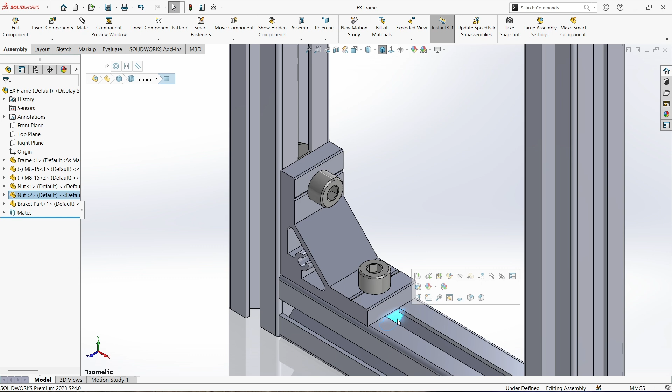You can use this feature like this. In this case, I have a bracket, bolt, and nut. If you want to copy this assembly, maybe you copy parts one by one, but that takes a long time. So I use Smart Component to make it faster.

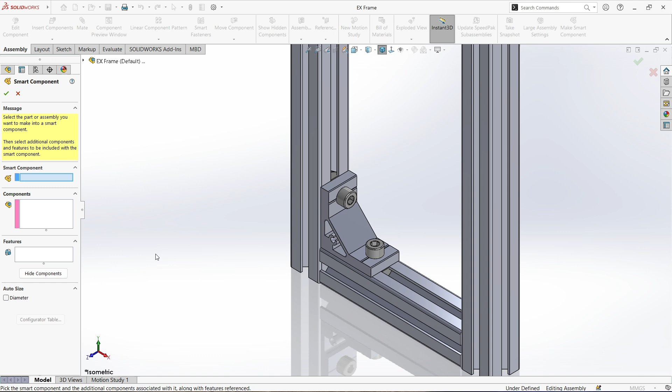Like this, activate Smart Component. Now you have three parameters: Smart Component parameter, Component parameter, and Feature parameter. For Smart Component parameter, click this part. For Component parameter, click this bolt and this nut, and click OK.

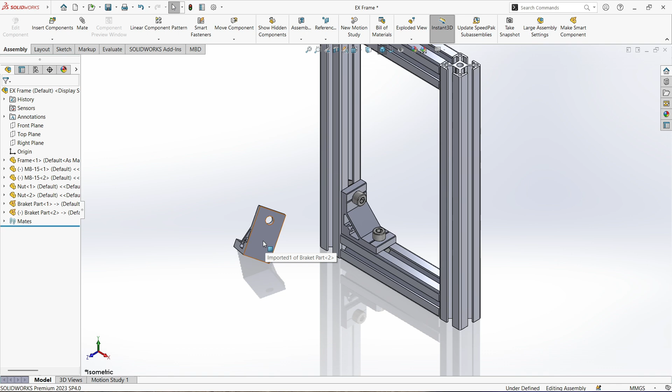Now just copy this part, this Smart Component parameter. Make this part fit to this frame like this. Click this face and this face, click coincident. Click this face and this face, click coincident. Click this face, this face, this face, and this face. Create with mate and OK.

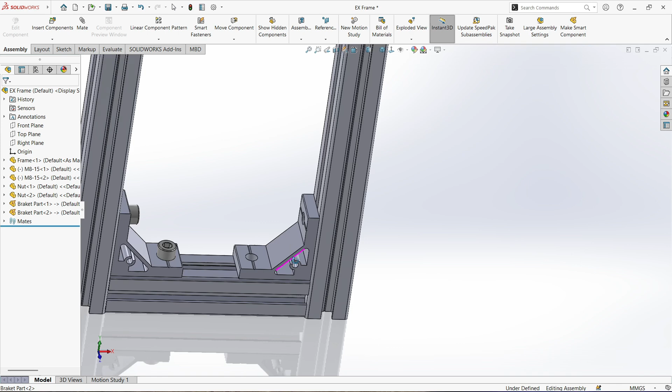After that, right click this part, click insert smart feature, click OK. Now you have a component parameter. Just check all components and click OK. See? Now you copy the part with its face.

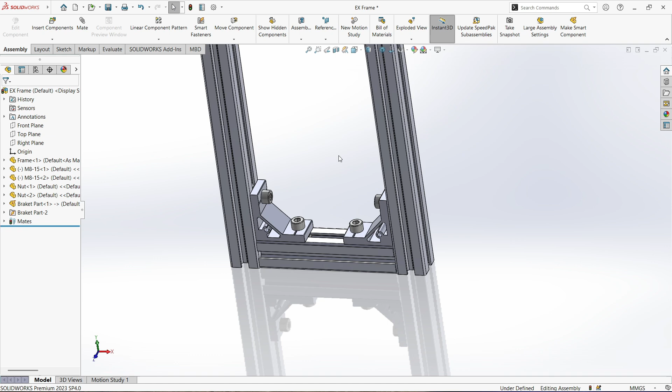Or you can use this feature to copy the hole. In this case, I have a plate, a bolt, and I want to make a hole in this base. First, make this plate fit into this base, like this.

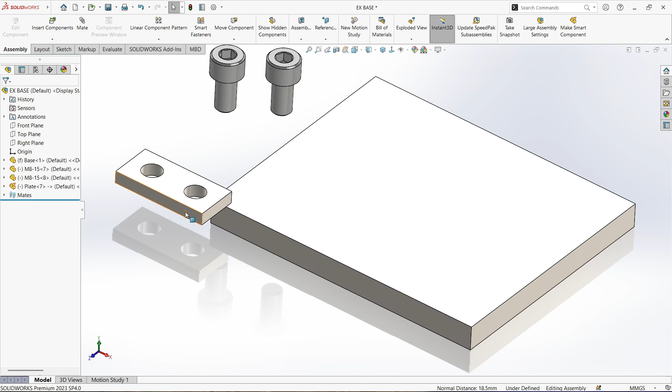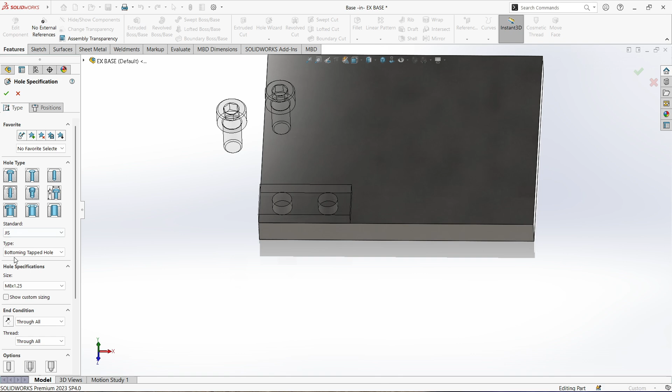Click this face and this face, make coincident. Click this face and this face, make coincident. Click this face and this face, make coincident. After that, click this face, go to edit part, go to feature, activate hole wizard, choose hole type as straight tap, choose size as M8, and go to position, click this face, click this point, and click this point, and click OK.

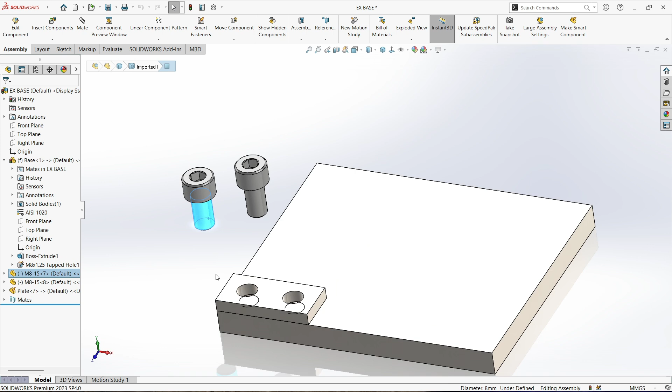Make this bolt fit to this plate. Click this face and this face, make concentric. Click this face and this face, make concentric. Click this face and this face, make coincident. Click this face and this face, make coincident.

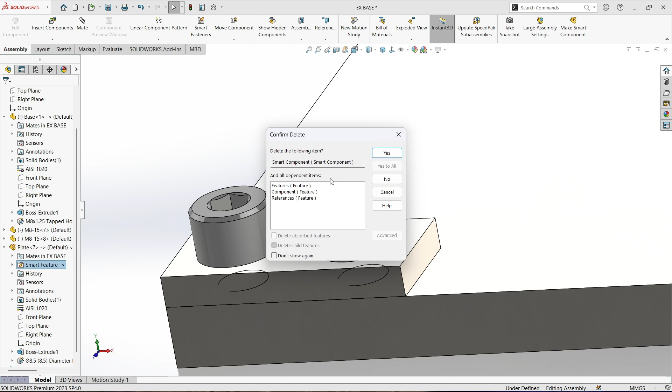Now activate Smart Component. For Smart Component parameter, click this plate. Smart Component parameter, click this plate, and Component parameter is click this bolt, and for Feature parameter, click this hole.

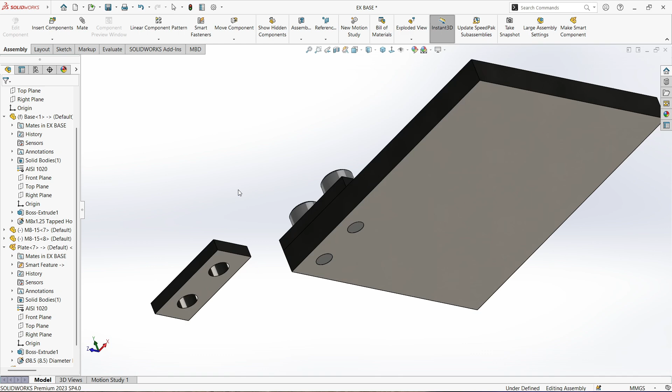And OK. Now copy this plate. Click this face and this face, make coincident. Click this face and this face, make coincident. Click this face and this face, make coincident. Right click this plate, click insert smart feature, and click OK. See? Now you have a feature to reference the face of a hole.

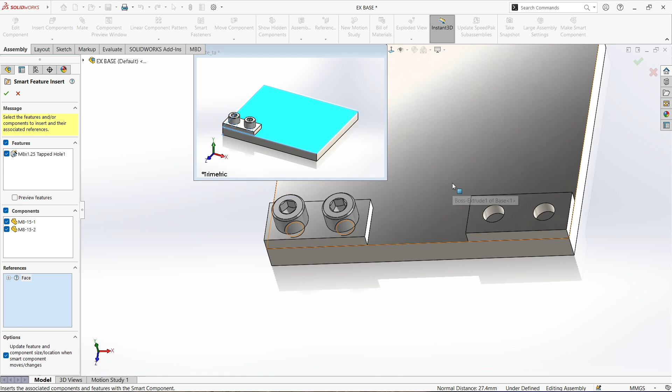In this face, click top face and click OK. See? Now you make another hole quickly.

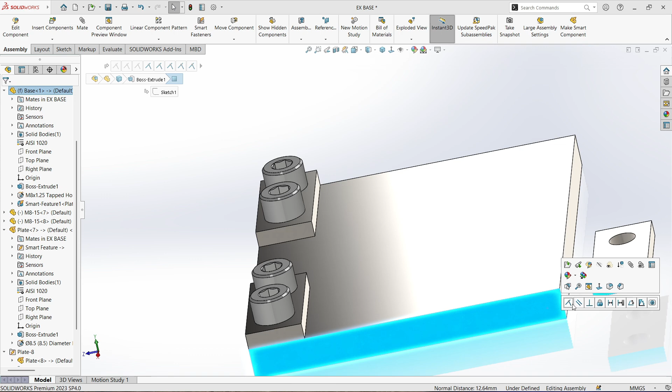Let's try again. Copy this plate, click this face and this face, click OK. This face and this face, click OK. Maybe I want to try this hole in the middle base. Click this face and this face, this face and this face. Make with mate.

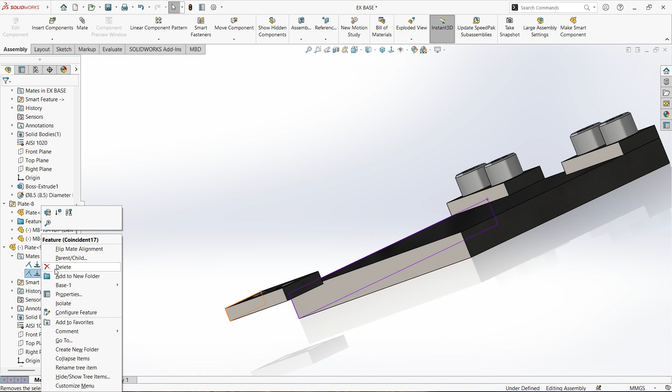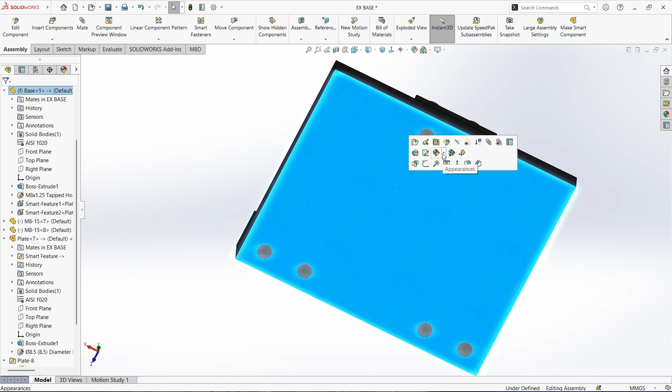Make with mate, okay. Now right click this plate and click insert smart feature. And click this face, then OK. See? Now you make a hole easily, like this, so you can use Smart Component to make a hole quickly.

See? Now you know how to use Smart Component. That is Quick Tips. See ya.